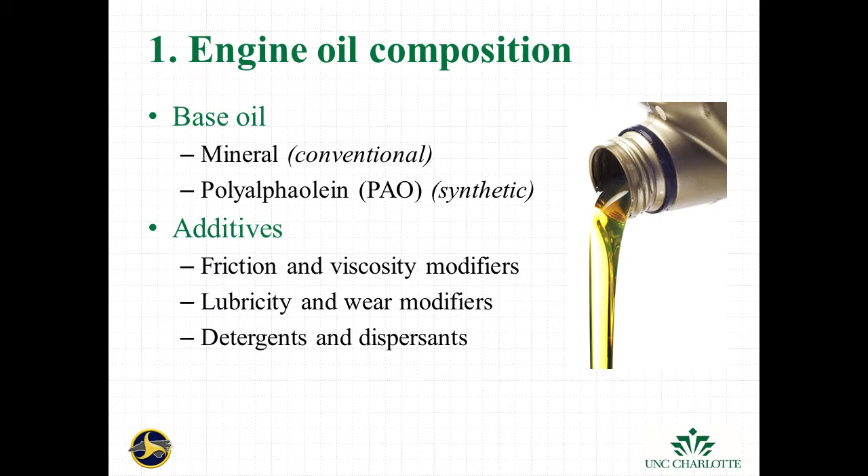We add stuff for lubricity, which sounds a lot like friction, but it's a little bit different. And wear modifiers so that we can impact how the wear surfaces interact with one another based on the oil, the thin film of oil. And we throw in detergents to keep those surfaces fairly clean, and dispersants to keep the stuff that comes off of that suspended in the oil and not depositing in other places. So the bottom line is this base oil has a bunch of additives thrown onto it, and that impacts how this thing changes as it ages.

And so what happens as it ages? One of three things, or all three things actually, can occur, and almost certainly two of them will. The oil will chemically degrade. It is a chemistry problem, and the chemical makeup will change. The base oil materials will react chemically with the oxygen, nitrogen, and sulfur that it comes into contact with. And as those reactions occur, these harmful compounds, and harmful sounds really bad, it's not quite that bad, but things that are detrimental, not positive for the engine, are formed.

And in order to slow that down or offset the impact of that, we add in the additives, and they sort of absorb that. So think of it as a shock absorber. They'll absorb some of those chemical reactions until they run out. And so essentially we start with this reserve of additive and deplete that chemically. And so we're trying to make sure we don't get too far down that road. Viscosity can change. It doesn't have to. It doesn't always, but it's not uncommon.

And we say degradation there, but it can go either way. Your viscosity is one of those things that's got to be in the sweet spot, so to speak. If it gets too thick, if the viscosity increases, that's a problem. The oil won't flow right, and that comes really from a thickening because of soot intrusion. So as the combustion occurs, you get some blow-by, it gets soot into the oil, causes it to turn to that nice black on the right, and can thicken the oil detrimentally.

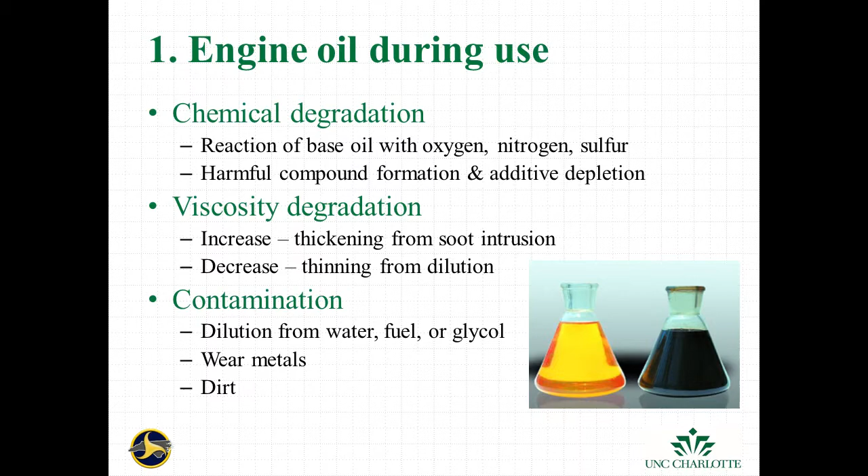Of course, it can dilute, that impacts your viscosity, or you can get stuff in there. And stuff can be anything from dirt, which is very detrimental, to a lot of the wear metals. So your coppers, your tins, your aluminums, your irons, chromiums, those types of things. And so these are the sort of things that we look at as changing as the oil ages, as we run the engine with the oil in it.

And so the first thing we had to do, because we're monitoring these oils throughout a relatively long period of time, we had to determine how bad was bad enough to change the oil. And so these are not hard and fast, but they are some pretty good ideas on where your oil quality thresholds need to be.

Of course, viscosity, those numbers, 12.5 to 16.3 centistokes, that's set by SAE, that's just a J300 for 40 weight oil. That's an SAE standard, and that is for 40 weight. Those numbers vary depending on what weight of oil you have. But we're running all 40 weight oils. And so that's our viscosity.

TBN, your total base number, is a measure of the ability to absorb acidic compounds, so to speak. And so the lower that number is, the less basic, the more acidic your oil is. And that really impacts the ability to offset the corrosion effect. And so that'll start out around 9 or 10. When it gets down to about 4, that's as low as we want to go.

And that's really a key one. You'll see some folks that'll tell you you can go to 3 relatively easily. I agree. You'll see some folks say you can get down to 1. At some point, you're getting pretty daggone acidic, and you're going to start oxidizing the pieces inside your engine. So that's a key one, your total base number.

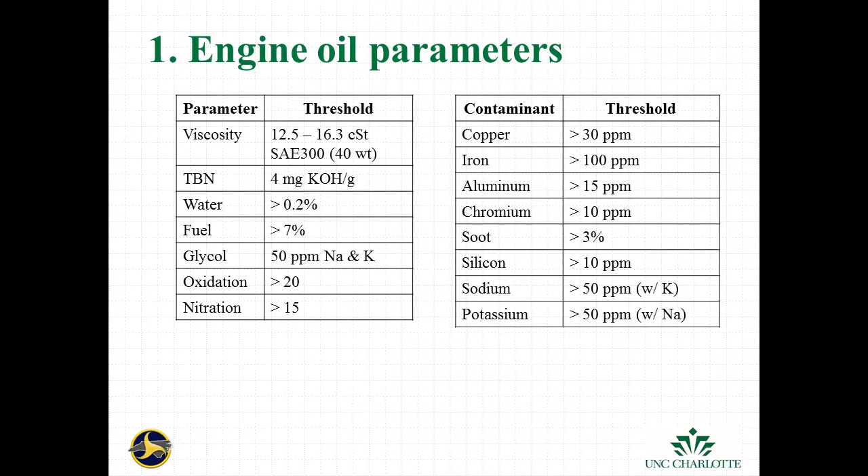Aluminum is the most abundant element on Earth. And so you always get that when you get dirt. And the aluminum in the dirt is different than the aluminum in your engines. So the wear pieces that come out of your engines, my understanding is they're soft enough, they're not detrimental to it. So we've got some thresholds, but we're not paying too much attention to those. Iron's a big one, as you would imagine, and silicon, just for the presence of dirt. So we set some baseline standards of thresholds of things we're looking for and levels we do or don't want to reach.

So what did we set out to do? Right now, North Carolina changes their oil on every piece of machinery that they have, either at 5,000 miles or 200 hours, or every year, or depending on who you talk to, every other year. But they sort of have a very set, very fixed, well, not completely use independent, largely use independent PM schedule. And so what we wanted to do was to evaluate that, essentially.

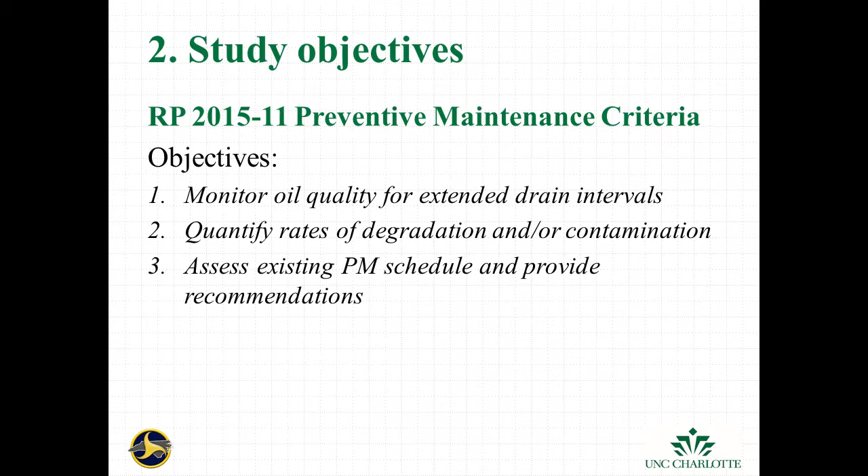And so we set out to run some of their machines without changing the oil on that schedule. Let's push them out, but let's do that carefully, and let's monitor what the oil looks like as we go, with the intent to determine rates of degradation and try to, not necessarily project out, but find out when was the right time, and then use that info to go back and assess their existing schedule and provide any recommendations. So that was our goal. That was our objectives.

We have and we continue to look at 4 different types of equipment. We're going to talk about the first 2 here. The Class 0209 utility trucks, that's the lower right. That's an International 7300. It's a standard. They use these things for all kinds of stuff. And so that's got a flatbed, but they can put any number of things on the back of those. They're running an inline 6. I can't remember the exact number on the engine.

But they got a handful of those, and then we've got a handful of these Ford F-350s. We call them IMAPs, Incident Management Assistance Patrol Trucks. IMAPs, right? Sponsored by State Farm.

I get paid no extra to say that, but North Carolina I think does.

And we've got several of those running. We've got some really interesting stuff in those. We're also looking at some mowing tractors, both mowing tractors and slope mowing tractors, just 2 different sizes there. We'll talk about the trucks today.

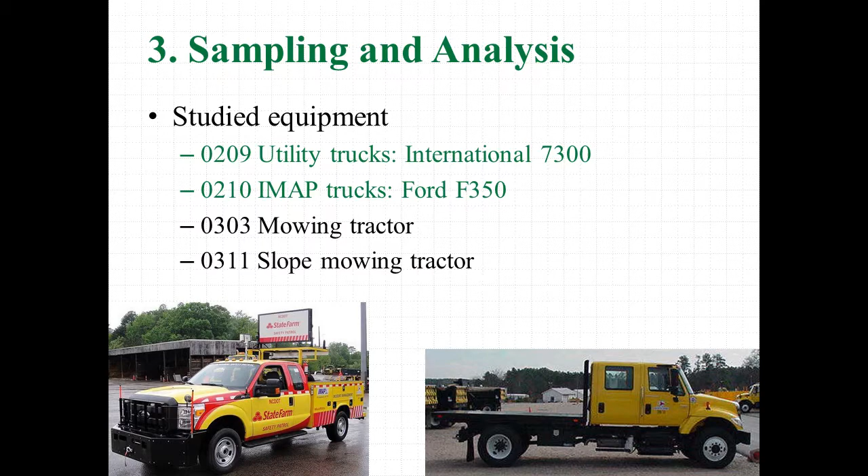So what are we doing? Well, we are collecting oil periodically. We pick it up at about 1,000 miles. So once they change the oil, we get a sample at about 1,000 miles, 3,000, and 5,000. And then we're going every 1,000 or 1,500 after that. So we're picking it up as we go. Every time we pick up 3 samples, and then we're averaging those together. So all the data you see today is the average of the 3 samples that we've got at those ages.

And we pull those in, and we're using an OSA 4 TruckCheck. I don't know if you're familiar with that. It's about the only self-contained, out-of-the-box, ready-to-run benchtop oil analyzer that we can find. It's been pretty good. It's not perfect. I can talk to you about what we've learned about it if you're interested, but it's been a pretty good tool for us.

It uses dual atomic emission spectrometers and infrared spectrometers. Basically, it vaporizes the oil into a plasma ball and then analyzes that, and has the ability to give us viscosity at both 40 and 100 degrees C. So it's a pretty self-contained unit. We can do a sample in about 15 minutes. But we can only do about 3 an hour, because then you got to flush it and it's got to calibrate and that sort of thing. But it beats 3 weeks off in a lab, which was really the key to this. So that's what we're using.

Just as sort of another baseline, we pulled some of the fresh oil, so oil that's never been in an engine. And they're using 2 types of oil in North Carolina. Everybody but the IMAPs uses the conventional Conoco Fleet Supreme 15W40. So that's everything else, which is somewhere in the neighborhood of about 8,000 machines.

The IMAP trucks all run a Shell Rotella T6. And when we started pulling some samples for that, we noticed that the viscosity that we were getting is substantially lower than what Shell says it should be. And 14.2 to 12.8 may not look like much right now, but when we look at a couple of charts here, it's a big difference. And in fact, if you can remember back, the minimum is 12.5. And so we're running down about 12.8, close to that.

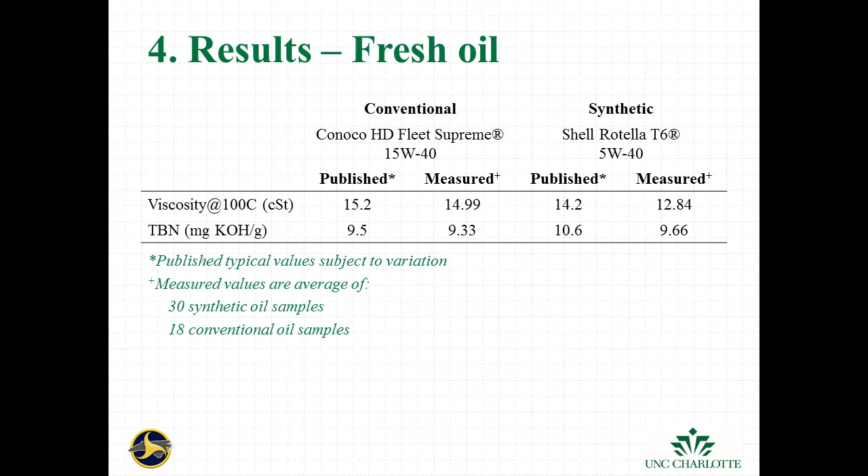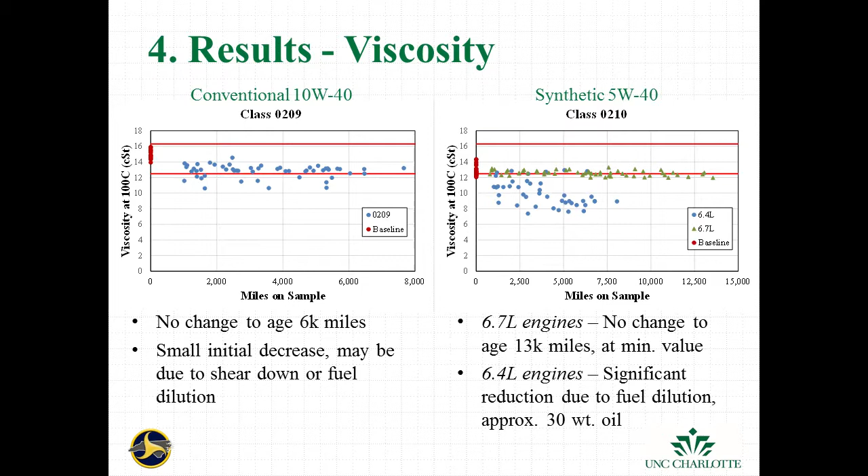But in the old engine, in the 6.4, it's nowhere near a 40 weight oil. And when you're down at a viscosity of 8 or 9, that oil is no longer behaving like a 40 weight oil. And that's a result of fuel dilution. From everything the people I've talked to, the things that I've read, the things that I've seen, everyone says, yep, it's a 6.4, you've got a bunch of fuel in there. Could be a problem. But it was very interesting. It was the first piece that said, hey, there's something very different here. So that's from a viscosity standpoint.

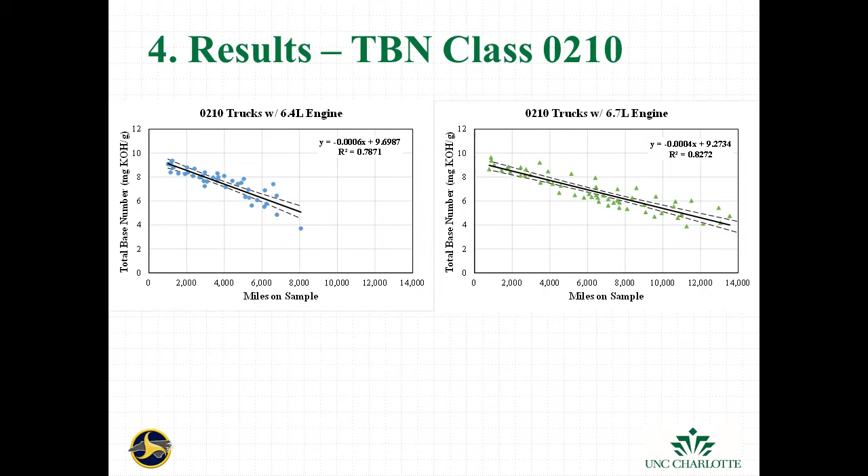We're seeing real differences just in the fact that it's changing, and the fact that we're getting differences between the engines. So I had that on there. That was just to show these are our confidence intervals, which means, based on our data, we would estimate with 95% confidence that our number is going to fall between those two. And we were using that to say, okay, if it looks like we can get to 4 at 13, when are we really getting there, and it's back a little bit. Pretty tight data though, really.

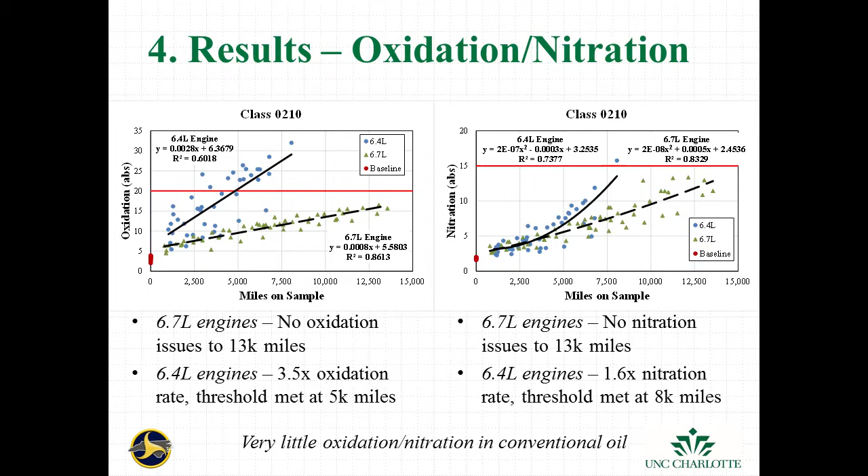I should say, if you do take a look at the paper, the data here is different, because we wrote the paper in July, August of last year. And what I'm showing here is updated to around about the end of November. So some of this stuff looks a little different just because we've got more data to show here. But again, the 6.7s are performing quite well. The 6.4s are performing okay, but they're not lasting nearly as long.

So what have we pulled out of this? A couple of things. The truck check, and this is not a commercial for them at all, but it works. It's worked relatively well for us. We can run a sample and get a result in about 15 minutes. Before the guys are done buttoning up the truck, they usually know whether they need to change the oil or not. We don't always do that, but if it's a special case and we really need to know, we can know in about 15 minutes what the oil looks like.

In the group that we're looking at, we're not seeing contamination. So of those three possible things, contamination is really not an issue. We've seen very little of the wear metals. We've seen no soot really, no dirt, none of that stuff. We are seeing some fuel get in there, but really not a contamination issue at all. It is important to look collectively, comprehensively at what you get. There is no magic bullet. You can't just look at TBN, you can't just look at viscosity, you can't just look at your iron. You've got to look at all of that collectively to assess the quality of your oil and its performance.

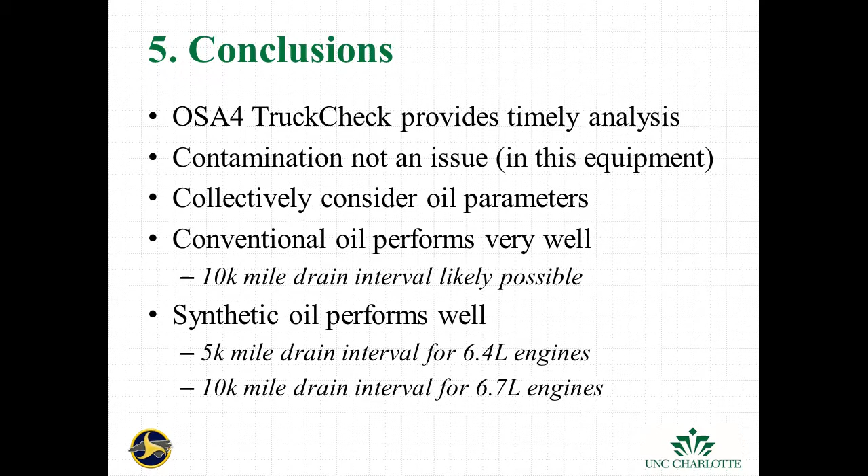Our conventional oil is performing very well. They're changing it every 5,000 miles now. It's quite likely we could push that out to 10 with no issues, maybe beyond. We're pretty comfortable with 10,000 miles. The synthetic oil, on the other hand, is performing well, but not as well. It very much depends on the engines. We're probably going to have to maintain the 5,000 mile change on the 6.4s. Probably can't push that out, and if we could, it wouldn't be very far. But on the 6.7s, we can probably double that to 10,000 miles. So where do we go from here?

We are going to engage some outside labs, or an outside lab, to measure our fuel dilution. The one drawback to the truck check is that because of the way it analyzes the oil, it can't detect diesel in the oil. The diesel and the oil are chemically, molecularly so similar that it can't tell the difference. So even though we're pretty confident that what we see there is fuel dilution in the oil, our results come back with zero fuel every time. It just can't tell them apart. So we're going to have to send that off just to determine how much fuel dilution we really have.

Also, since we're going to do that, we said we ought to verify those parameters for the fresh oil on the synthetic side because they are different from what's published. All of the IMAP trucks run the synthetic oil, and because the conventional oil is performing so well, we said, why don't we take a couple of those and put the conventional oil in them and see what happens. If it worked very well, they only run two products and you could eliminate one of them from the shop. No need to keep the synthetic if you can run straight conventional on everything.

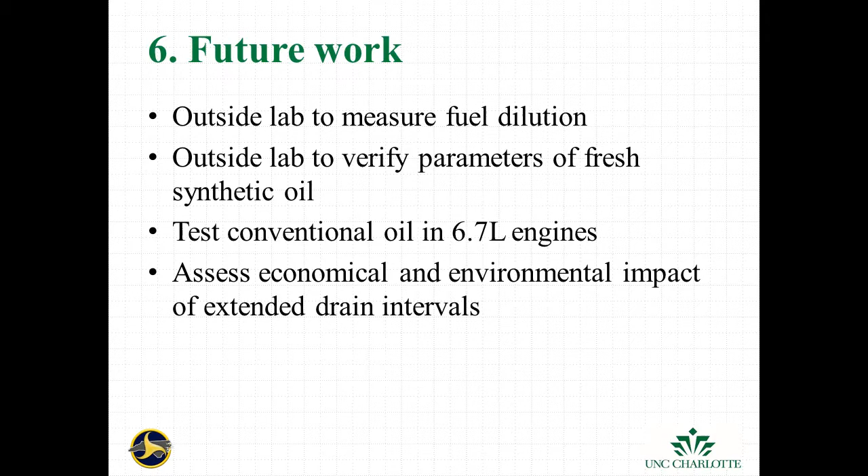And then the long-term goal will be to assess the impacts of extending the oil not only economically, right? Your costs are going to drop dramatically, but also from an environmental impact. You're just not producing as much waste oil, handling as much waste oil. Okay.

And with that, do you want to do questions now, or do you want to do them again? Sure, we'll take a few now.

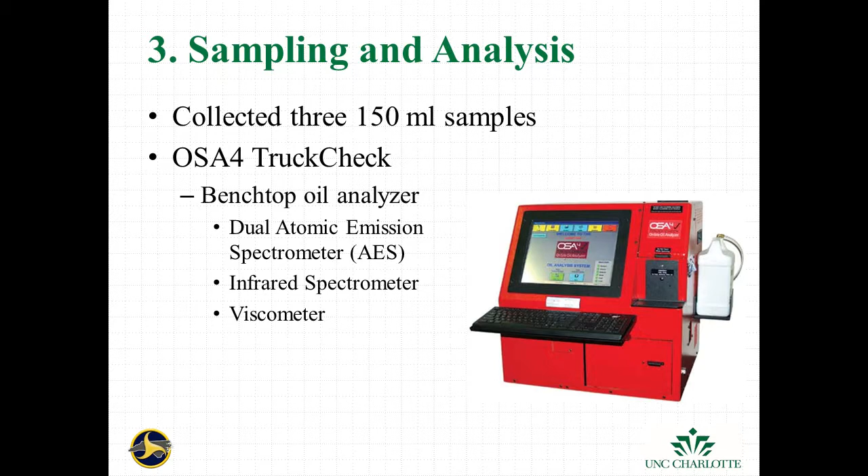Do you envision you'll be able to double the oil change interval in the equipment? We're not sure. Well, on the tractors, yes. What we've looked at so far is just the mowing tractors. That data looks a lot like what we see for the 0209s from a TBN perspective, except we see a little bit more decrease, but it's still very flat.

Did NCDOT change their service hours as a result of this study? Not yet. This study itself runs through August of this year, and we'll wrap it up. And we're looking at another project to go to another part of the state and look at a different set of equipment to continue this and broaden it out.

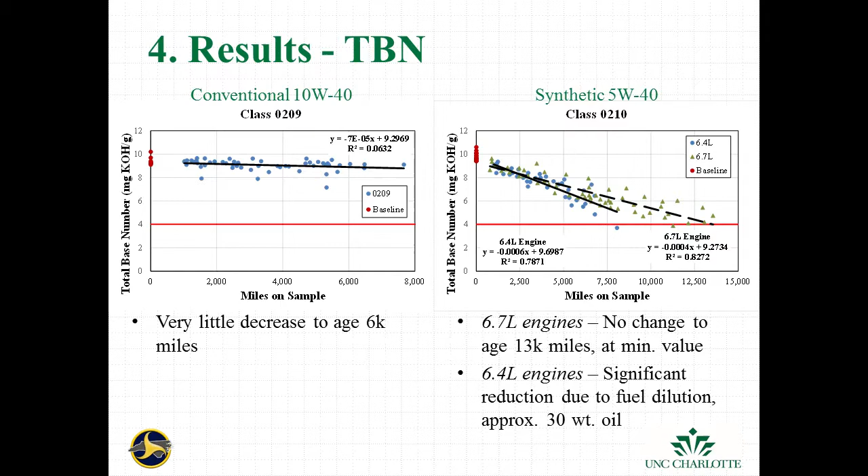Is mileage the best way to measure wear on the oil? Because I imagine different size vehicles are used differently. I agree. Is it the best way? No. If we really wanted to get down to engine load, Phil could probably tell us better, but you would measure RPM seconds or something, right? I'm not sure whether it's an RPM second or a degree second, whether you're looking at engine temperature. Maybe you need a combination of those two. But it's easy to get, and it beats the heck out of a calendar.

One of the things that we're going to do this spring that wasn't listed there, I think a surrogate for miles driven can be fuel through the engine. We have the data to dig back through and get gallons of fuel burned at each of these and measure age that way, which is not as good as the degree seconds, but it's probably better than miles, particularly on the trucks, because these guys idle a lot. We capture some of that in the mowing tractors because it's an hour meter, but not here. Good question.